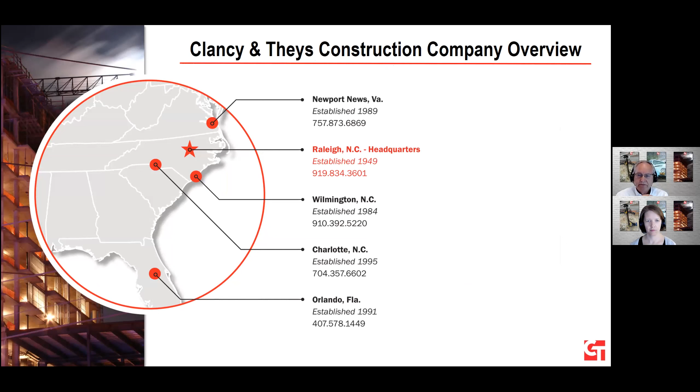Many of y'all may know us already, but we have 5 division offices up and down the East Coast, of course with an office there in Charlotte. We were founded in '49, a 71-year-old... privately held firm. Last year, our volume was around 634 million total annual revenue, and we ranked 36 among the top contractors in the Southeast. So we're proud of that.

So today, the agenda quickly is going to cover this: a very quick introduction to virtual design and construction. Most of y'all know what that's all about. What we're going to talk about, many of the professionals, designers, and contractors are already familiar with a lot of these tools, probably using a lot of them. Some of you out there may not have seen them totally in action. So what we wanted to do is give you an example of what some contractors are doing, particularly what we're doing, and how we're using these tools, we think sometimes in a unique way. I think it'll just help give you some ideas of what is there and how we can all work together to create a more collaborative environment.

Some of the tools that we use are reality capture, model coordination, and collaborative reviews, which we will certainly touch on, among some other things. And at the end, we'll have some time for Q&A.

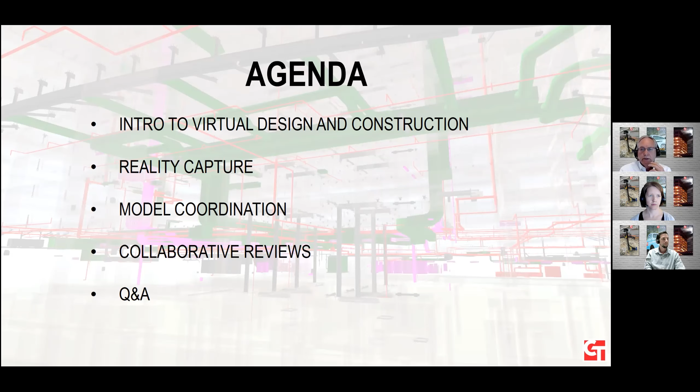I had the opportunity to attend a webinar recently featuring Martin Fischer. He's a professor at Stanford University, and you can be forgiven if you don't recognize that name, but he is considered the father of the process that's called virtual design and construction, or VDC. So he began his presentation with a quote from his father that I think is a great way to start this program.

I'm not going to get into the full story, but it seems the 11-year-old Martin did a lousy job with the task he'd been assigned by his dad, and he admitted it was because it was too much trouble to go down two flights of stairs to retrieve the tool he needed for the job.

So when Martin fessed up to his dad, his father said, 'You're an idiot if you're not using the best tool possible.' So I think that planted the seed in Martin's head for virtual design and construction.

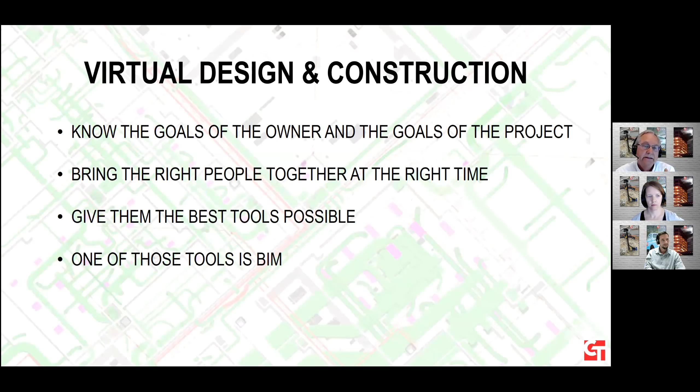So what is VDC? I'm not going to get into a 2-hour description, but basically it uses computer models and other tools to help visualize cost, schedule, and process. And VDC is an inherently collaborative process. While we use the technology to help us through these processes, it's really about the people and about the collaboration of the team, but the tools help make that process more efficient.

So a couple of quotes here I think really tell it all. One is from the American Institute of Architects, that BIM provides a platform for collaboration through the design and construction process. And another one I particularly like from Michael Schrage is that the key to successful collaborations is the creation and the management of shared space. And that shared space is what is so important to make this work, and it's what a lot of these softwares allow us to do.

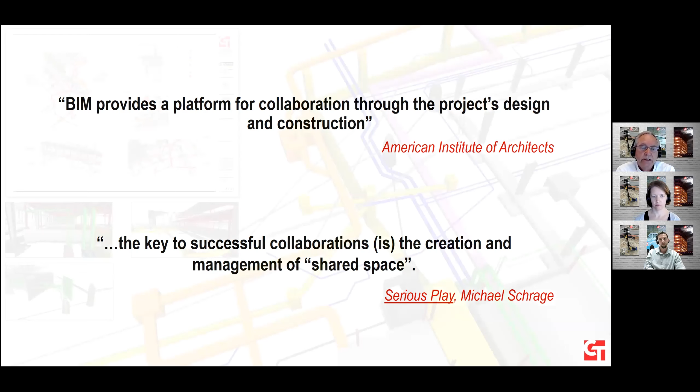So a typical BIM process, this is where we started 14 years ago, and it really remains the central core of what we do. There are 2 stages of coordination in any kind of a construction project.

At first, it starts with the designer, and they develop a proof of concept to be sure that what they have designed will actually work in the field. But then it comes to the contractor. So why would the contractor also be creating a model if the designers have done so?

Well, many times the specs are performance-based and not prescriptive, so the items furnished by the sub might not match the component that's in the model. Sizes are not necessarily going to be the same, which could cause conflicts. There's also a lot of new information brought from the subs at this point: code information, shop standards, and sometimes, believe it or not, some things just don't work out as expected. So that's where the contractor comes in.

So we start replacing the designer models with our subcontractor models to do this final coordination process.

But what's really fascinating today is that there are so many new tools or technologies available that allow us to capture the real world around us and merge it with what we are setting out to build. This helps us see our projects in a very new way, and it gives us more opportunities for collaboration. It basically expands that shared space that I mentioned earlier.

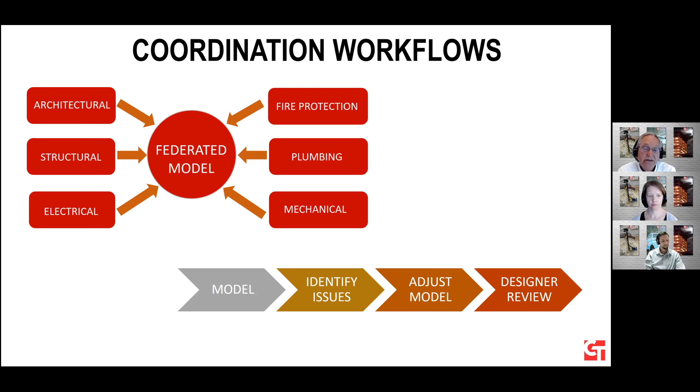Some of those reality capture technologies include photogrammetry, where we use a drone to capture existing site conditions, which we can then convert to a digital 3D model; a laser scan, which will also produce a very accurate 3D model of a built space; or a camera that takes 360-degree photos.

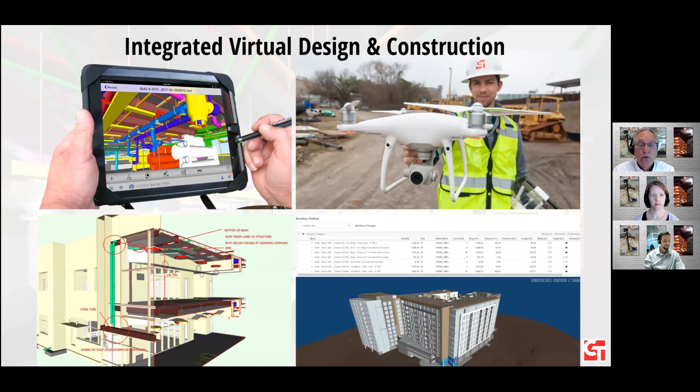So now I want to turn it over to Laura and Kyle. They're going to show you how we are using all these technologies on our projects.

All right, thanks, Harry. So starting off here, I'm going to run through just 2 of those reality capture items that Harry touched on, explain them a little bit further, and then we'll jump into some case studies and show how we're really utilizing those.

So from the reality capture perspective, one that always gets a bunch of buzz is drone technology. We're not using anything special, it's just a commercial grade drone that anyone can go out and buy. It really allows you to get some really great unique angles of the project that we weren't once able to do in the past.

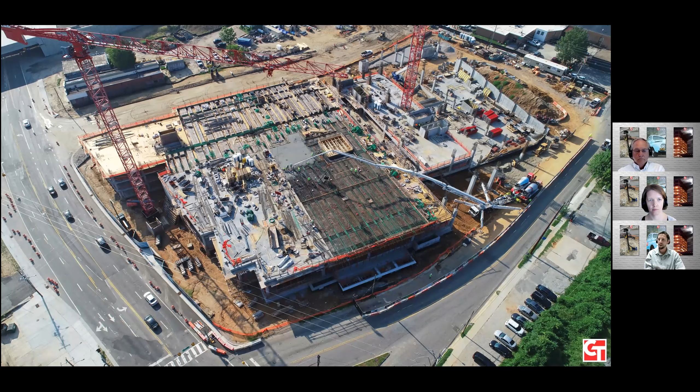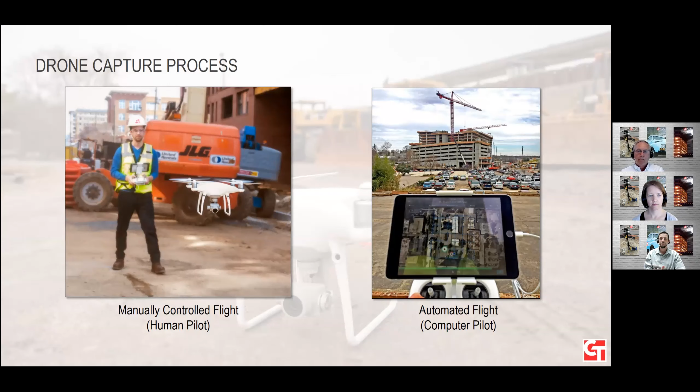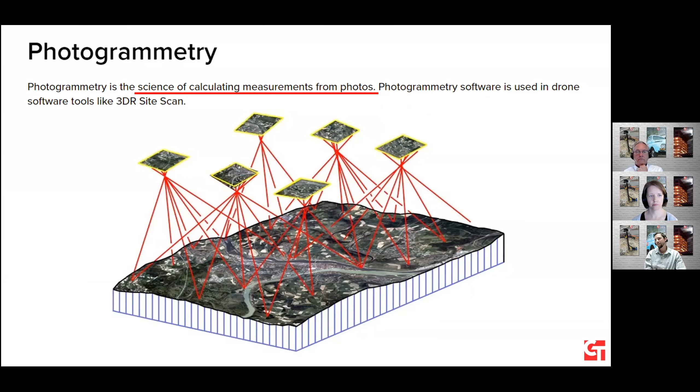With that, there's an added feature here of not only using the drone, but some added software that allows us to fly it manually or automate some of these flights. As Harry touched on before, it uses something called photogrammetry, which I think describes it very simply: it's the science of calculating measurements from photos. It does a lot of neat stuff in the background.

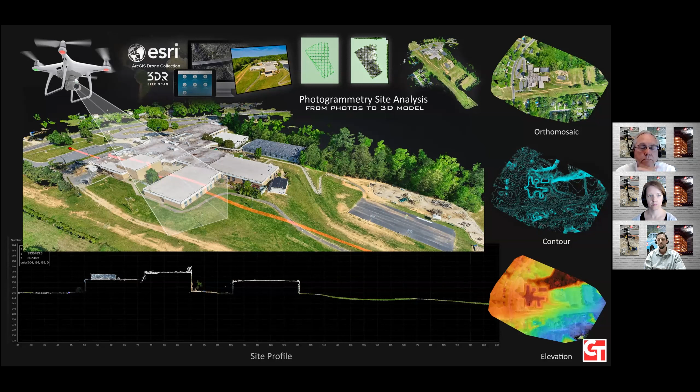The one software we're using in-house here is actually SiteScan, which is owned by Esri. It allows us to take photos, convert that into 3D geometry where we can use 2D images, generate contours, elevations, and allow us to do a lot of really cool stuff just from photos.

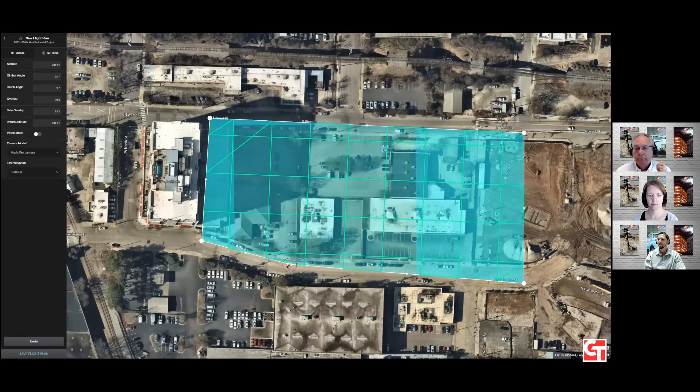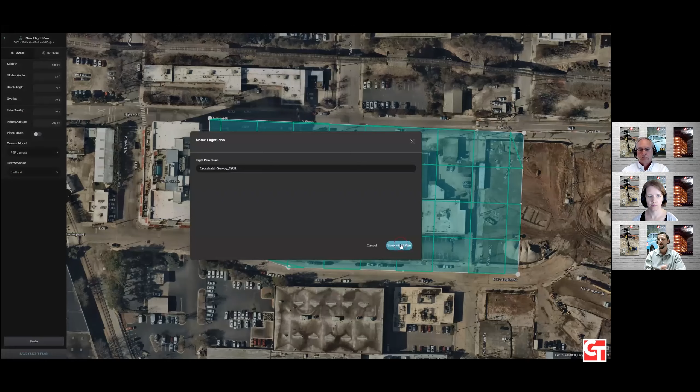This explains the process, and you'll actually see this project in the case study in coming sections. Essentially it allows us to select what boundary we want, auto-generates the flight path of the drone, you fine-tune your settings, push it out there, then go out to the site. With that app you have the drone, you fly it, and then you get back that data. With the data, we really get 3 things back.

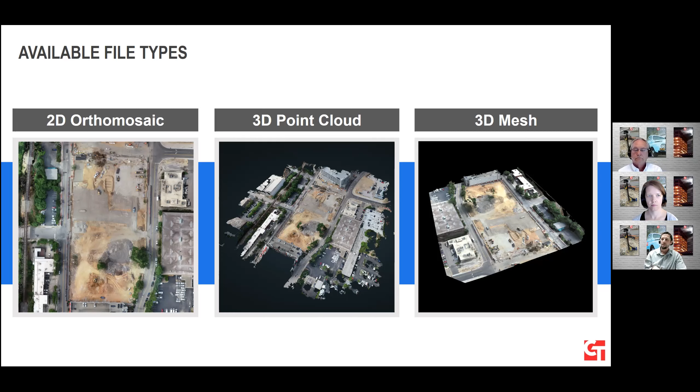We get a top-down 2D site plan image, and then you can get some 3D files as well, point cloud and a mesh file. Here's a video just showing you what that looks like in real time, hopefully coming through okay.

There you saw a point cloud. Here's just spinning the mesh model around. Like I mentioned before, you'll see this project in a coming section of how we merged it with some of the modeling components.

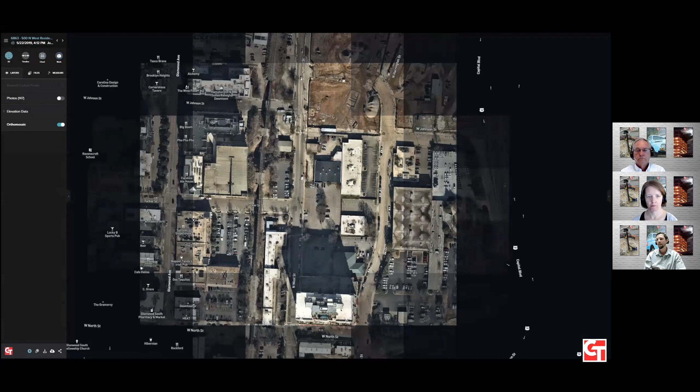And then this last one, the top-down satellite image, is great if you want a real-time site plan of your job site. If anyone's gone on Google Earth, you know, those can get outdated pretty quickly.

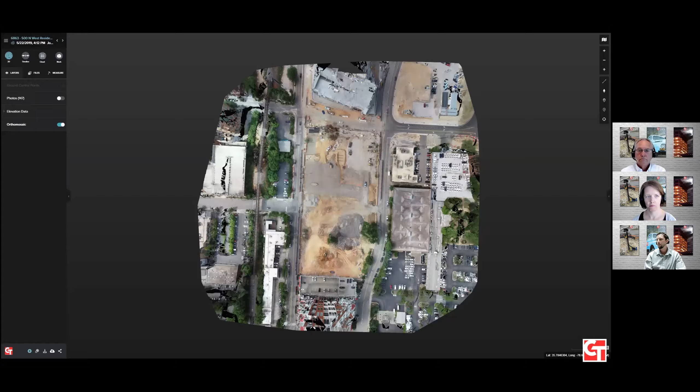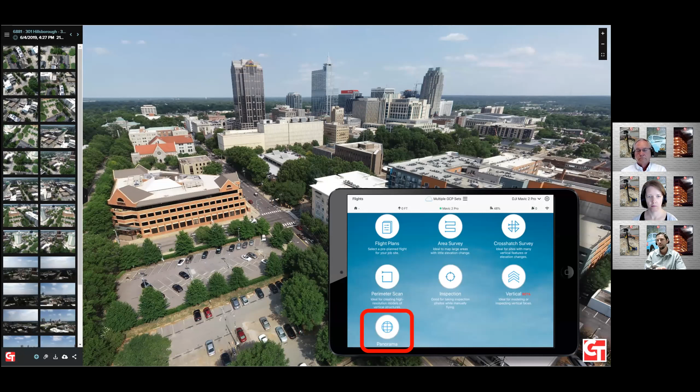The last thing we can do here with our automated process is go up and take some panorama photos with the drone. On the left, you can see there's like 30 images there. It takes separate images and then allows us to stitch them together into a single image.

We can view it in multiple different ways, but here's just a panning view of what that panoramic looked like on one of our sites in downtown Raleigh.

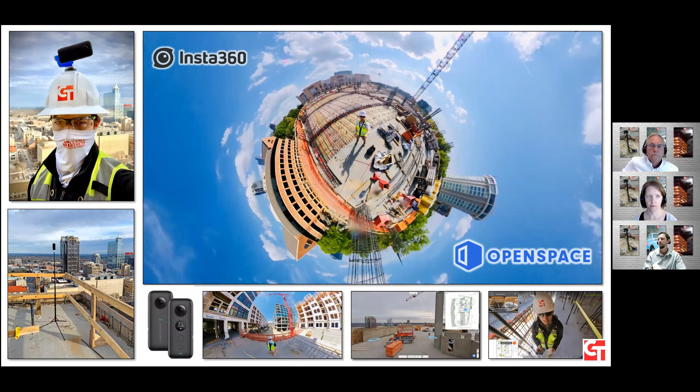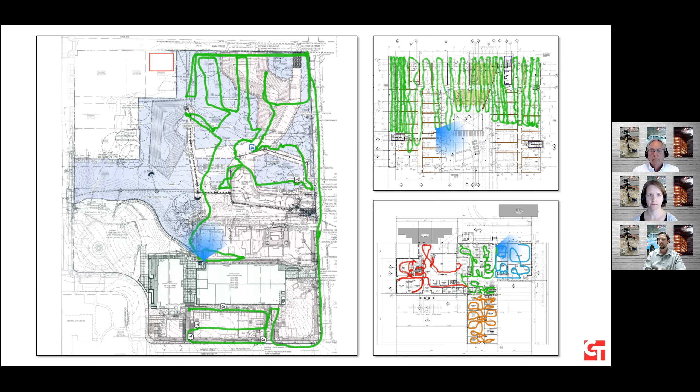Much like with the drone, you have the technology itself, but then you have the software. For us, we're also partnering with OpenSpace. This allows us to take that camera, do our walks, and automate this into a virtual job site walk. Much like Google Earth Street View, we can walk our site and virtually rewalk it anytime in the past. We can do entire job sites, areas of a building, or even specific rooms if that's something we want to do.

This is just a video that gives you a good sense of what that looks like. On the left-hand side, we can mount the cameras multiple different ways. That video in the top right corner is showing you that virtual walk we did.

Basically you access that through a computer, a web browser, anyone can get to it. We're doing this over the duration of the job, so we're getting multiple dates. We can compare dates, and we can upload some of our model content, which is really fascinating for us to compare design to being built. There's just a lot of potential, a whole presentation in this in and of itself.

So with that, we're going to move over to model coordination and touch on how we're using all these technologies together in the course of a project.

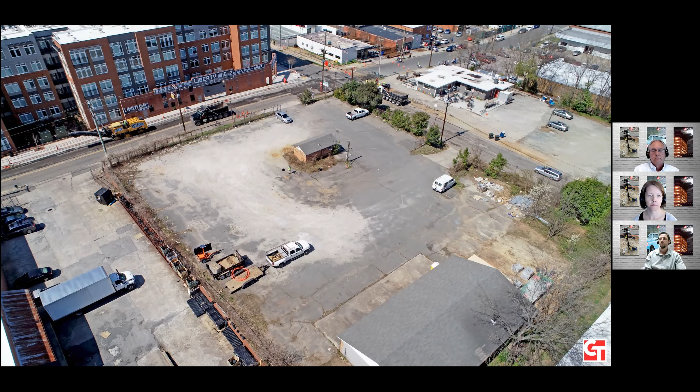The first one I'm going to start with is one I was working on, where we're looking at the site analysis. A lot of times we get involved in jobs early on before construction's even started. In this case, there were overhead power lines bordering two sides of the site, and there was a lot of talk early on about how that impacted the job itself.

So what we're able to do is go out there with the drone technology I just explained, and we can capture these conditions. Here's a view of what that looks like virtually. We can pull some measurements and do some neat stuff in there, cutting profiles and analyzing the site conditions further.

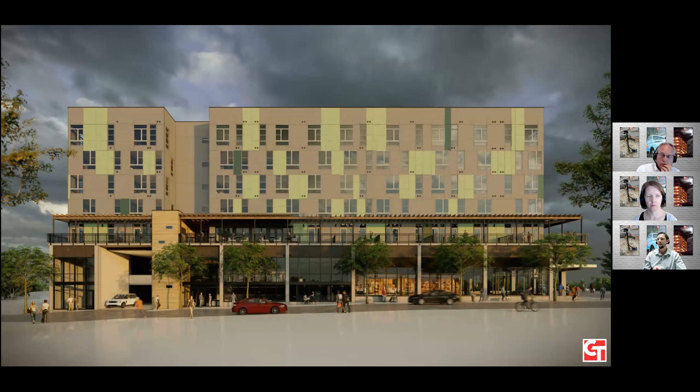We can then take that data and overlay it on the model itself to provide that additional context. Why that's important is because the architect's job, what they do best, is really designing the building itself. They don't necessarily have the resources to go do all the survey of the surrounding conditions like we just mentioned. That's where we're partnering, really capturing the surrounding conditions so we can analyze this stuff early on in the process.

When we start merging these two together, it often takes this nice clean image that you like in designing, and those site conditions make it a bit messy. With our technology, we can really walk through the space almost like a video game. Here's a view of one of the softwares where we took that drone scan—you can see on the left that little pixelated point cloud, and then we have the architect and structural model on the right-hand side.

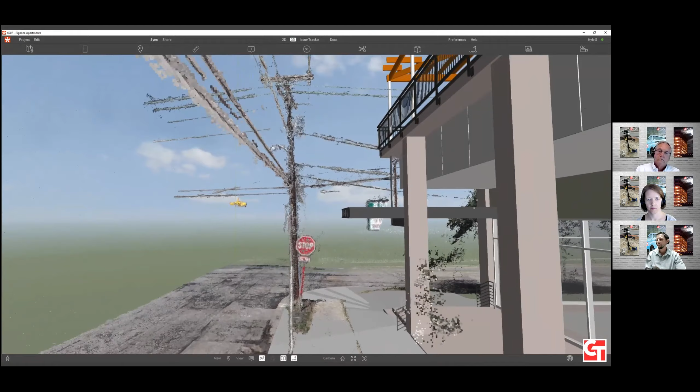So now we're just doing some quick analysis early on, seeing how those telephone poles, overhead wires relate to the building. Once we do this, we can then start logging some of these issues, digging further into it.

How this ultimately ended was transferring that into a 2D document where we're talking with the design team on clearances we need, and talking to the power company about relocating these wires and what's the process involved. This really allows us to get a head start analyzing all the unknowns early on in the project.

And I think that would be a good segue into this other case study that I'll let Laura touch on here. Sure, thanks Kyle. So this was another, the title of this presentation is about collaboration. Here we were working with the owner to help evaluate the foundation system for a mixed-use property in downtown Raleigh.

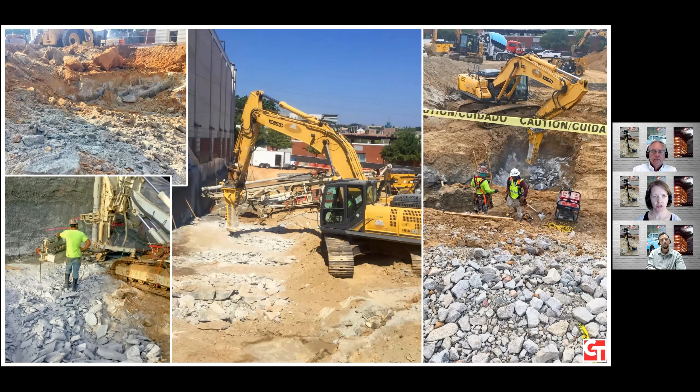So once we got out there and started digging, we were hitting rock. We were concerned about blasting being so close to this building back here, so we talked to the owner about it. We came up with some potential solutions, but this is also where we're collaborating more internally.

Our project management team is collaborating here with the resources that we have available in VDC. Not to get into too much of the specifics, but we really wanted to see where we had to dig down to get to rock and where we would have to excavate rock, and then have a conversation with the owner about a potential change to the foundation system in certain areas.

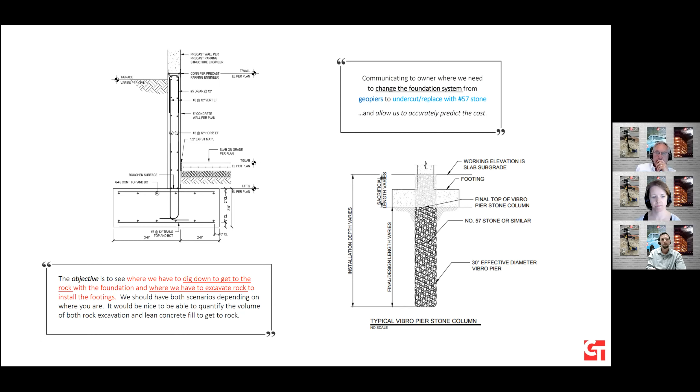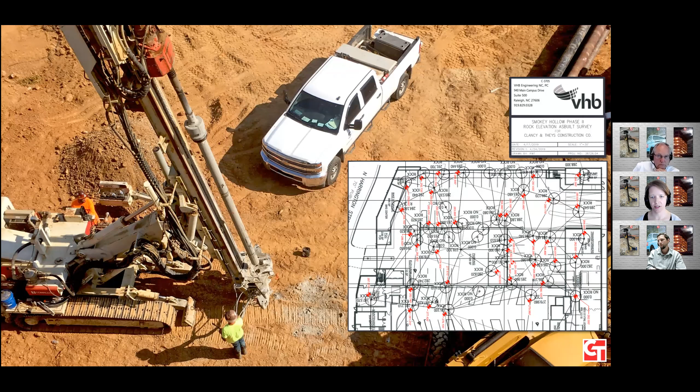So here we've got another updated shot looking at what's going on out on site, and we were able to hire VHB to come out and do some borings for us. They gave us the drawing you can see on the bottom right here, some elevations of where they were hitting rock. So this is pretty low hanging fruit for what we were trying to do.

We then took that information and put together a really rough model. I think a lot of times when we think about 3D computer modeling, we think of super accurate, maybe even photorealistic, or when we're thinking about coordination, we think about fabrication-level models from subcontractors. But we can really use some basic modeling like this, which just shows the surface of that rock based on those points that VHB gave us.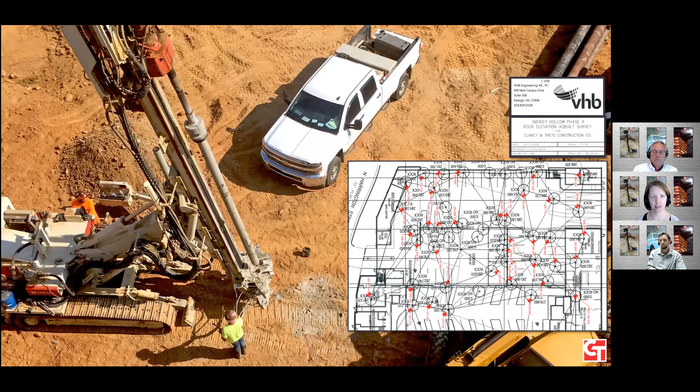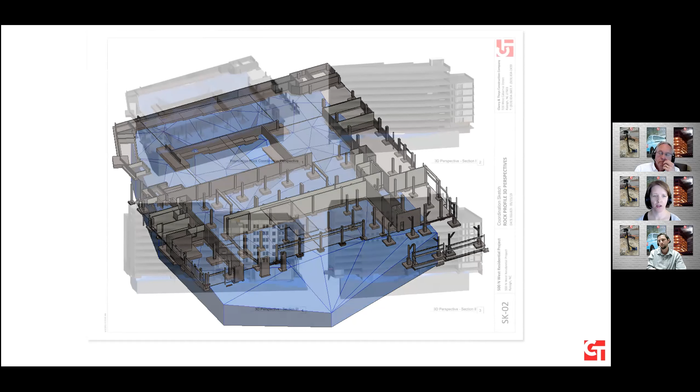So then what we can do is, like Kyle was showing, we're layering different types of information on top of each other. In blue here you can still see that rock surface, and then we put the designer's model on top of it to see where the foundations interacted with that. With those, we're able to create 3D sections, 3D perspectives, share this with the owner, and get the conversation going. So we thought this would be the end point for this exercise, which it was, but then our project manager came back to us and said, what else can we do?

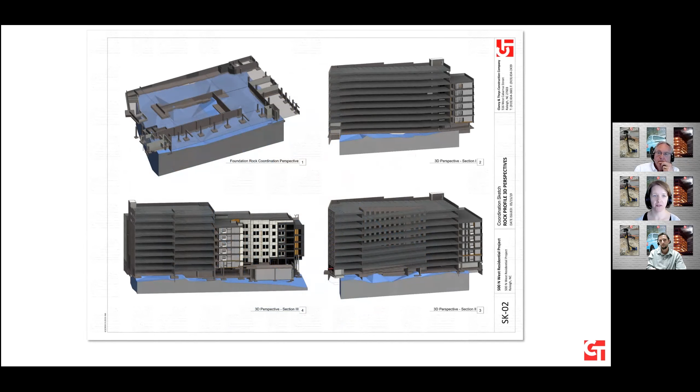So we used more technology that we use during our typical coordination process. If you've all heard of clash detection, seeing where, typical example, a pipe going through a duct. Well here we were looking at foundation versus rock. We're able to provide this view showing where that did happen.

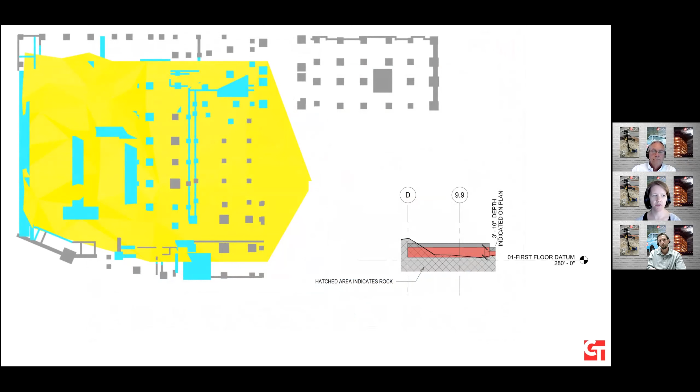From that document, we were able to provide a 2D drawing that showed more clearly what these elevations were, where the different breakdowns were, so we could see what areas specifically might be able to change.

Once we had that information, it was another step where it was like, okay, well now what else can we do? We wanted to be able to give our team a really rough calculation of a cut fill analysis looking at this system. So we actually did a little bit more detailed modeling of that surface in order to get what you see on the upper right, being able to calculate that difference there.

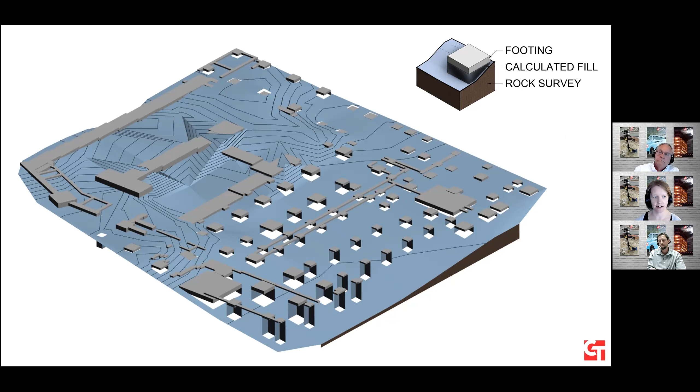We took that same point cloud that Kyle showed earlier in the presentation. A point cloud is literally just a bunch of points that exist in 3D space. So we take that point cloud and then we layer on top the designer model, and then we can produce something similar to what we saw in that first exercise, but here we've got the point cloud in there.

We can see the rock surface we modeled in blue. You can see the point cloud, and how it's following that rock surface below. So this is a 3D representation, and then the model.

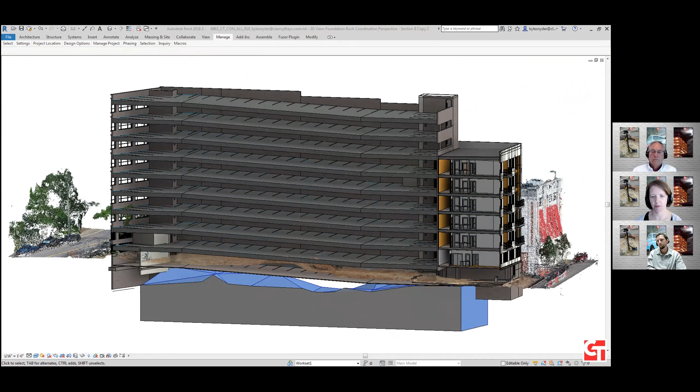We've got lots of different types of information shown here, and this is showing how it's layering drawings additionally on top of that. Being able to put 2D information on top of 3D information helps to connect the two. Not everyone is super comfortable, especially on the owner side. Designers can visualize the 2D on top of the 3D, but I think it really helps other people get into the model and the drawings and see what we're talking about.

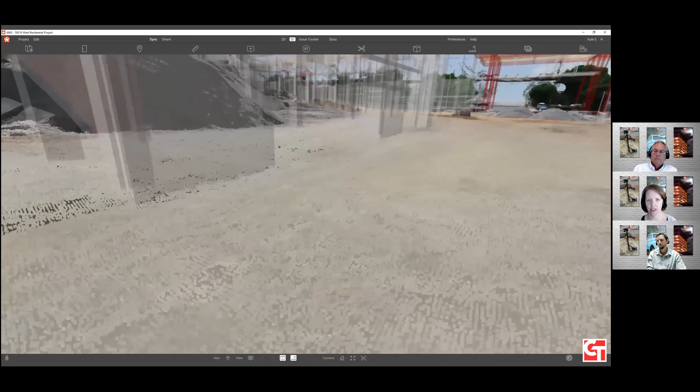We can really dip down and see what's going on underneath. Having all these resources available helps us layer on all that information. So here we're actually going under. We can see that foundation that we did additional modeling of, and we can see the point cloud above. That's what's really interesting, that we're able to combine everything to better share what we are doing with all this information.

With that whole exercise, we were able to help our team, the owner, and the design team all with that one shot. Now just moving from the underground of that wrap building to MEP coordination with the office building.

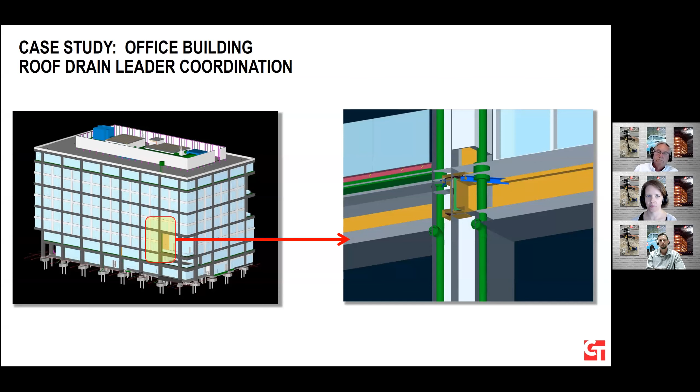So this is when most people hear VDC that are familiar with the term, this is what you think of - coordinating systems, mostly overhead in a building. We typically hold weekly coordination meetings with our mechanical, electrical, plumbing, and fire protection subcontractors.

We get a model from the design team, we get models from our steel fabricator, and we can look at issues that may not have come up during design because of maybe a specialized way the subcontractor is installing something. We get into sleeves and fittings, all these things that really do impact.

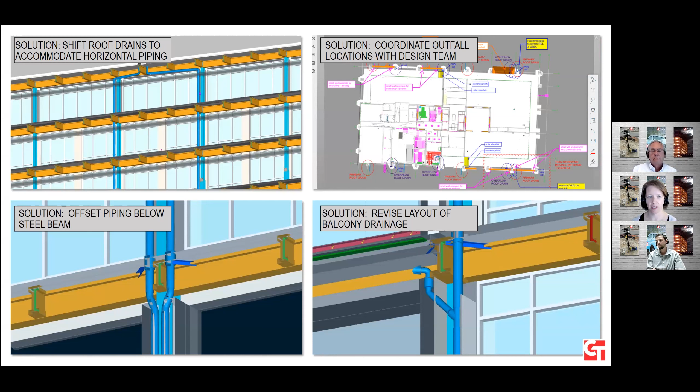In this case, it was looking at roof drain leaders, thinking about how we were able to identify a couple different issues. This took weeks, but then we're able to provide possible solutions and then work with the design team through a typical RFI process.

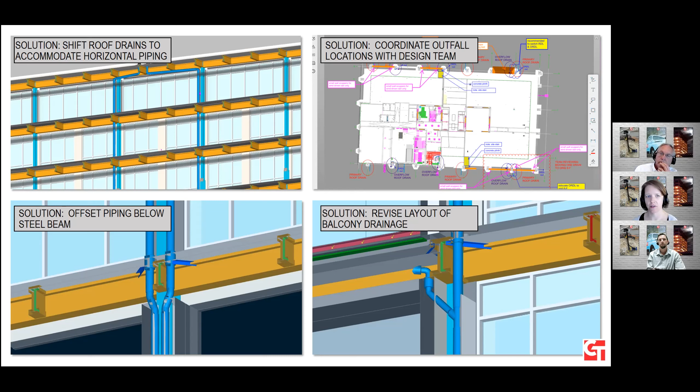Sometimes, like you can see in the upper right, it just comes down to we still use 2D drawings, especially for something like this where we're trying to coordinate outfall locations. So being able to identify the problem and provide a solution.

Similar to what we did here with some overhead systems coordination, and this was in the core and shell part of the building, where we had a very large duct, which you can see in green, that was throwing a little wrench in our plans.

So we do some supplemental modeling here when needed. In this case, it was modeling a ceiling as a potential tenant fit out, so you could see where that actually was dropping below. We're able to evaluate different options.

So our subcontractor can model different options. They can also provide cost impact for what that might be. So we can package it all into one when we're giving it to others for review.

What's important about this is really having everyone in one room. Well, now it's everyone in one Teams meeting, but sharing the screen and walking through the model really helps us to identify issues and communicate them to get a response.

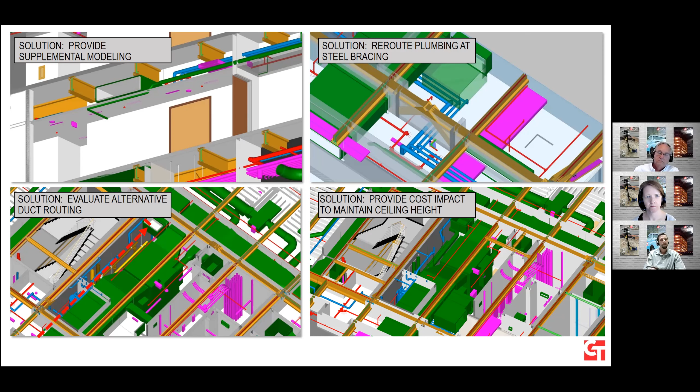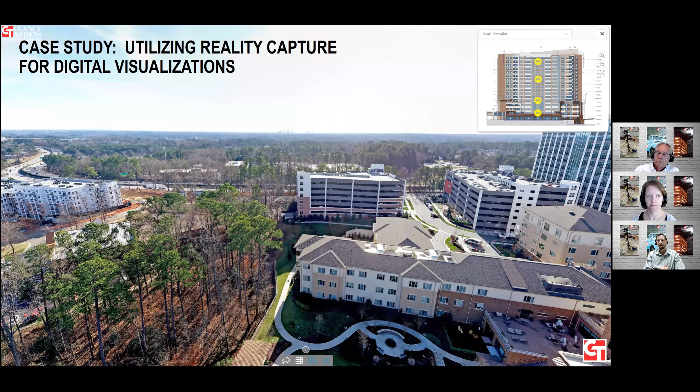Moving on, now I'm going to touch on a little bit of using the photo side of how we're using that for some coordination. In this case study, once we've started construction, there's a lot of questions about what things are going to look like. So in this case, there were some questions about what the various levels of this building, what your view was going to be.

So using the panoramic feature of the drone that I touched on previously, I went out and could preset the heights that I coordinated with the drawing, so I know we're getting up to those exact levels, and basically took 360 panoramas from each of those locations.

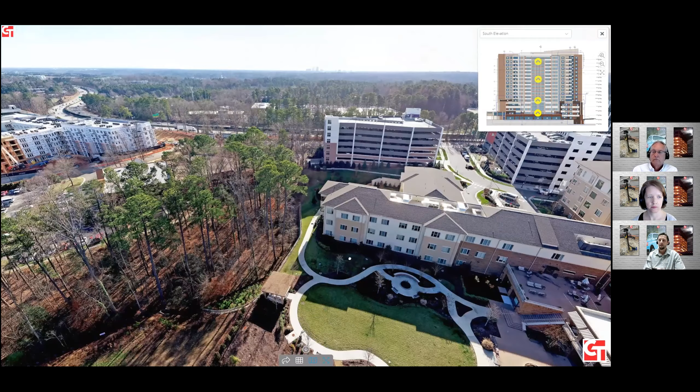Using some other software we have, we can create a bit of an interactive environment where we can share this, and people can click and view it on their own. What you're seeing here is just a few of those levels coming up, and I'm going to integrate a video that shows you from the ground to what the ultimate top floor of this building is going to look like. This helps give ownership and the various people on the team a good sense of what it's going to look like, what the views are going to look like, and helps drive decisions and marketing later in the process.

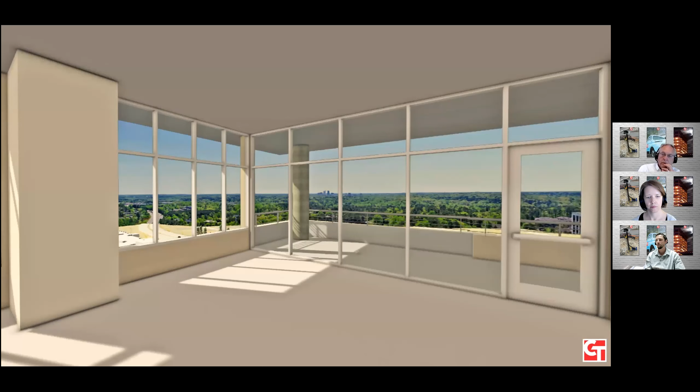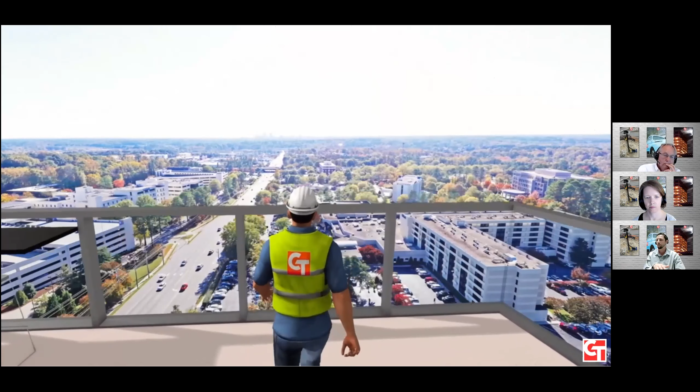So here's this video coming up. We can go ahead and capture those reality conditions. Taking this one step further, another thing we're starting to do now is not only view these 360 images, but also do some of that model integration you saw with the point cloud, but now on the photo side. So we can load them in the back of these models. You see that backdrop is actually a drone photo, and we can put it behind models to give you that next level. We're doing this internally, and also working with the architect teams to provide them the graphics, because the rendering components are really what they do best. So we can capture those conditions and provide it to them to incorporate on their end.

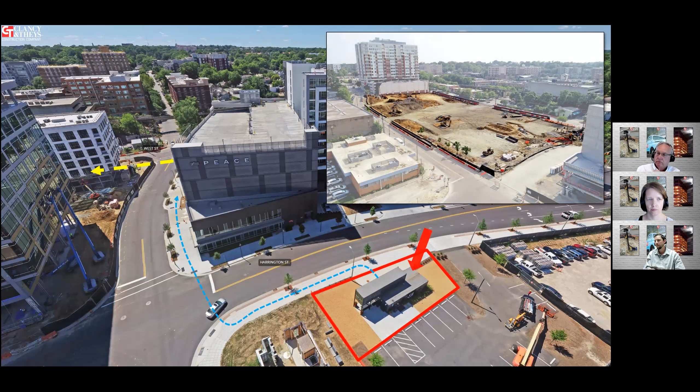Wrapping up, we're going to jump back to the site we've been touching on throughout the presentation, and this is a good illustration of it. In the beginning of the construction process, there was nothing on the site, just a dirt site. So the ownership team had an idea where they wanted to walk over to the parking deck of the first phase, that Peace building. They wanted to look out and see the site, but show them what it was going to look like.

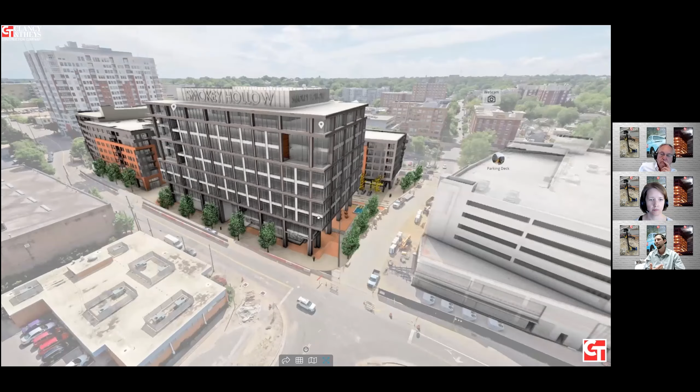So for us, we took the drone, took a 360 image, and then using our other technologies we can take 360 images of the model and simply overlay them in like a typical rendering process I would do at an architecture firm. So we put this together. You can access this on the computer or iPad, but the idea is you would walk over to the garage with the iPad, hold it out, and you could see what the future site was going to be. That way they could take prospective tenants and give them a virtual walkthrough of what the site was going to be.

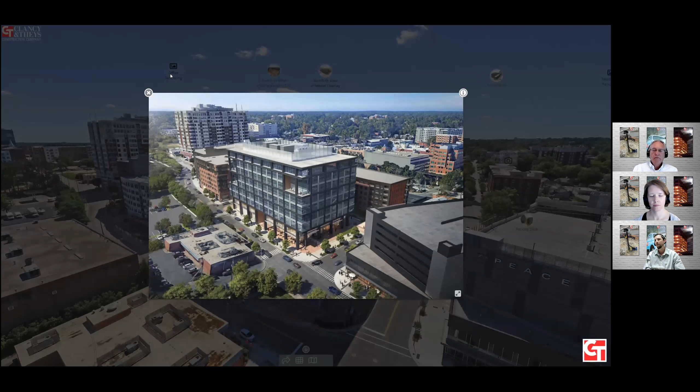I think it came out really well. It's an interesting use case of how we're integrating these various technologies, even from the photo end, and we're carrying this through to the actual construction itself. I like that end shot because it really shows you how realistic these visualizations actually carry through to the future.

So we've touched a lot on visualization with the drones. Now I'm going to touch on really how we're using it during construction, because that's also a fascinating piece of this. The great thing about the drone technology is we can get perspectives of the job that you wouldn't ordinarily get, and this has really paid big dividends for us in coordinating a lot of the penetrations with the structural concrete slabs. I'm going to run through a video illustrating some of this process that we've developed in-house here at Clancy and Theys.